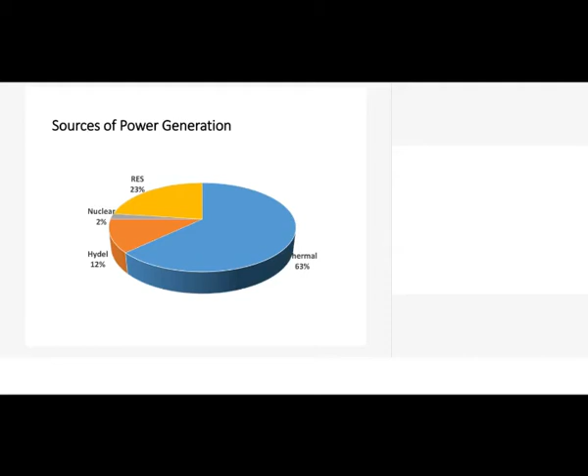Hello, yes sir, we can hear it. Okay, so this issue with technology, as we were just praising technology, we saw that my Wi-Fi got cut and I'm now on the hotspot. Doesn't matter, we always seek to find alternatives, and that is also the approach towards energy audit.

It's not all that easy. Energy audit is something where the designer has already built in something, and then the operations man is further trying to optimize as per his requirement. And then as an outsider, you go and try to meddle with the systems and seek improvements. It's a real challenge. So let's see, the need for energy audit is already known for those who have already seen these slides. It may be a repetition.

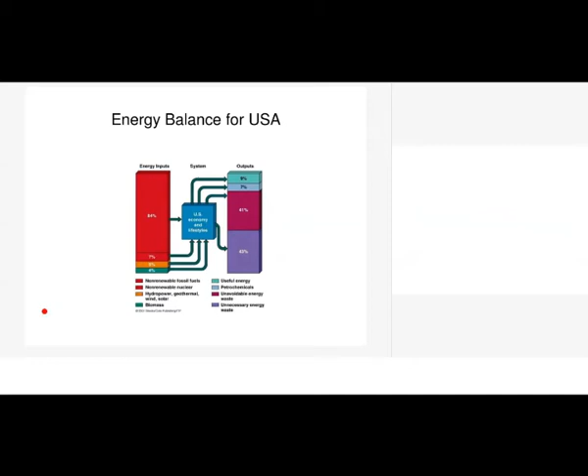Can you move to the next slide, Bharat? Control is with you. Yes, I will do it for you.

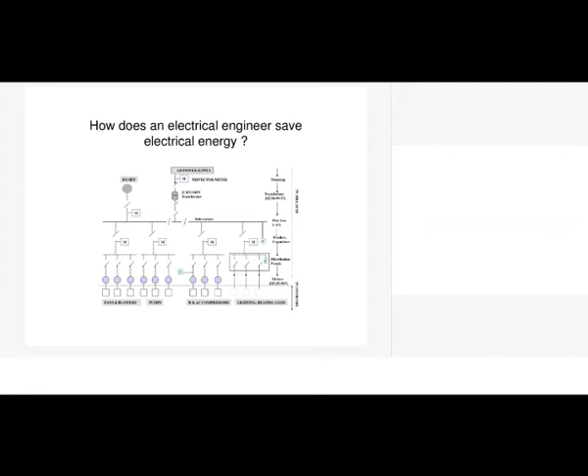Okay, again, let us say sorry that there are some problems here. Some work is going on here. So anyway, now let's go ahead. So can you now change yours? Are you able to change the slide? Yeah. Okay, fine, leave it. Okay.

Anyway, these are all things which are possibly known perhaps, and now what is meaning of purposeful energy audit? So there is a client who wants energy audit to be done, and what is his objective? His objective is to save energy, save money. Now, for that objective, how are you going to approach the energy audit? Because everything is new. As you enter the factory, everything is new, and we need to understand the process, collect information, maybe do some measurements, and then arrive at energy saving options which will be acceptable to the company. So this is a process. So in this process, the time you're going to spend is not much. Maybe you'll have to be on level or par with the people in the plant within a few days. You should be talking in their terminology, which means it's quite a big challenge for the energy auditor.

Now, fundamentally, as we want to save kWh, we know that it is a function of kilowatt, the power drawn, into number of hours of operation. So you can reduce kWh by reducing the power drawn, that is the kilowatt, or by reducing the number of hours of operation. So the potential exists for either or both, and you can reduce the kWh.

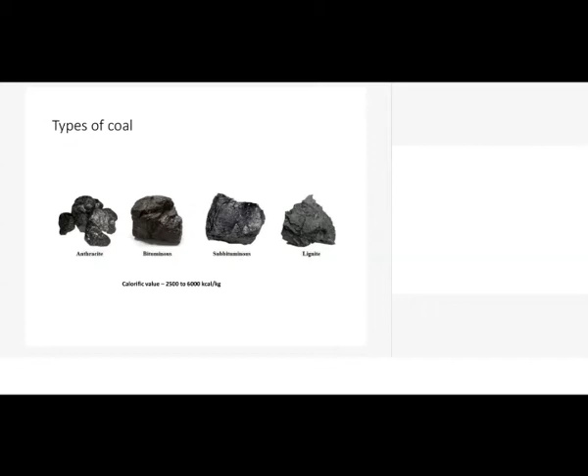So in many of these situations, when we look at an energy audit, normally we either focus on electrical energy or sometimes thermal energy, but in our opinion, over the past so many years we have done the energy audit, it always helps and it's beneficial to have an integrated energy audit consisting of all energy sources used in the plant. So these are the thermal energy sources, the petroleum fuels that we use, and then we also use coal for thermal energy.

In thermal energy we are mostly focused on efficient use of the downstream heat carrying medium, maybe steam or thermic fluid or hot water, whatever it is, because as we know, most of the boilers have become fairly efficient nowadays. So it's not like the Lancashire boilers, which were about 55 to 60% efficient. Today we have even fluid bed boilers which go up to almost 80% efficiency, and oil-fired boilers are anyway pretty efficient. So we had to look for reduction in steam consumption.

So that's how to optimize the steam consumption, reduce steam consumption, so that you can save fuel on the boiler.

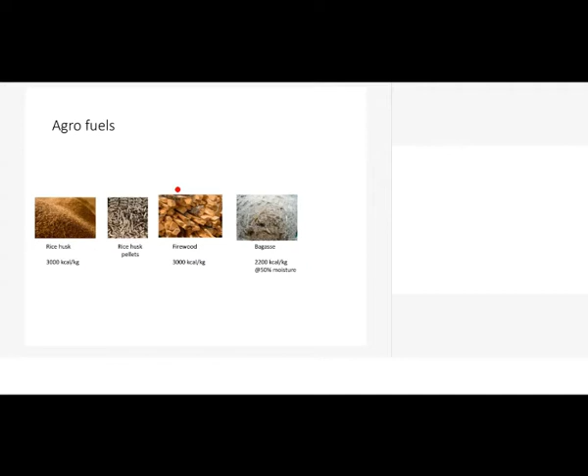So as we go into the plant, what is the first thing that we need to do? Of course, you shake hands with the head of the plant and get in touch with the people concerned. So preferably, we start with an opening meeting, where representatives from different departments are there, the head of the plant is there, and we explain the objectives of the audit. So then you get to know everybody at the same time, and also when you go personally to every department, the cooperation is ensured.

So you start with maybe a short opening session, maybe 1 hour. Tell them what the audit is, what we are proposing to do in the audit, and give some examples of successes which you have achieved in earlier audits. So it gives them some confidence, and also you can ask them about what are the various energy saving measures that they've already undertaken, so you know what is the level of the plant.

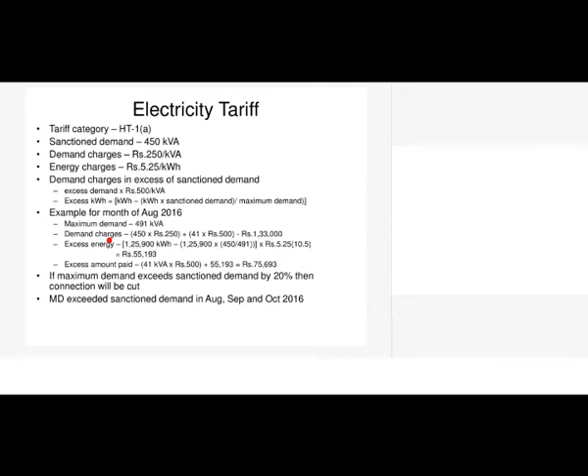So it's a two-part tariff, meaning that you have to pay for the demand, sanctioned demand 450 kVA, demand charges is 250 per kVA. So energy charges - these are all the things that you should be collecting in the initial stage itself.

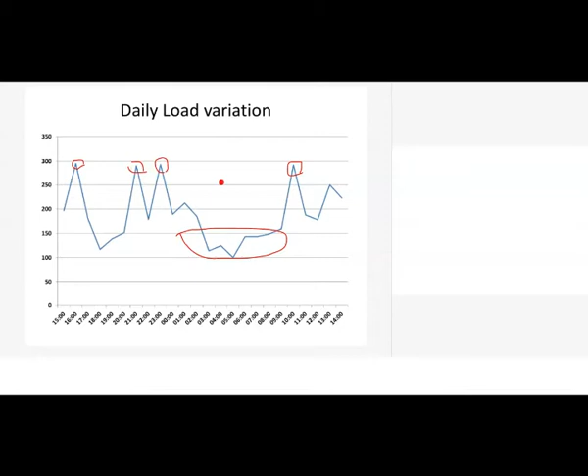So in bringing down the demand, again, you have to see whether it will serve any purpose. Because in some electricity boards or discoms, you have to pay for 90% of the contract demand, whether you use it or not - minimum 90% is the billable demand. In some cases, it is 100%. So it varies. If you are anyway less than 80% or 90% of the contract demand, it doesn't make much sense to do a lot of work to bring down this demand, since you will anyway be paying for the minimum billable demand. That is why the tariff clause is important.

And kVA, as you know, can also be reduced by improving the power factor. As you improve the power factor, the demand reduces. kW is equal to your demand into power factor. This is something which is often debated, whether power factor improvement will reduce energy consumption or not.

The power factor, cos phi. Now, what is this kW? Who decides the kW, or what decides the kW? So we have a motor, and then we have a pump.

Then the pump is pumping some water into the process. Now, this kW drawn by the motor - what decides the kW drawn by the motor? It's not the motor which says I will supply so many kilowatt. It is not the pump which says I will supply so many kilowatt. It is actually the demanded water - how much water is required here, at what pressure. The pressure of water and the quantity of water decide the kilowatt delivered by the pump.

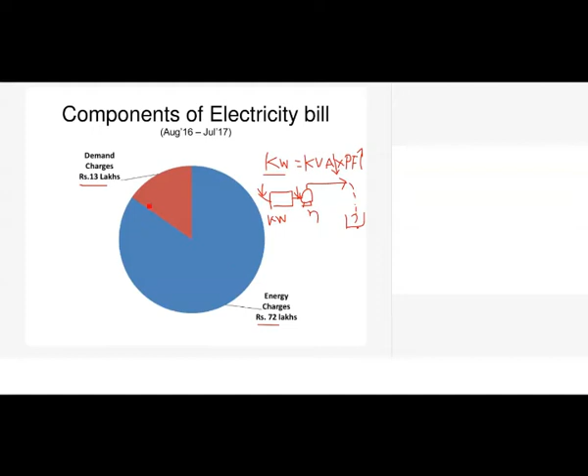And components of electricity bill - so as we see, what is the bill consisting of? The energy charges account for 72 lakhs. Demand charges account for 13 lakhs. So now we will see what is the impact or intensity of demand charges versus intensity of energy charges in a total electricity bill. This gives you a fairly good idea as to where the focus should be.

The most important thing, as we have seen in many of the audits, though not much attention is paid to this, is the energy balance. How much of energy is going where?

This is important. In the earlier days, there was no individual metering for different departments. But today's metering has become so easy and affordable that many industries have been able to segregate departments and provide individual meters for different departments. As a result, monitoring becomes easy.

Now here, in this pie chart, the printing machine section in this factory is consuming 51%, followed by post printing drives. So these are all the different departments: plate, baking, compressor, air conditioners. So all these different departments are there.

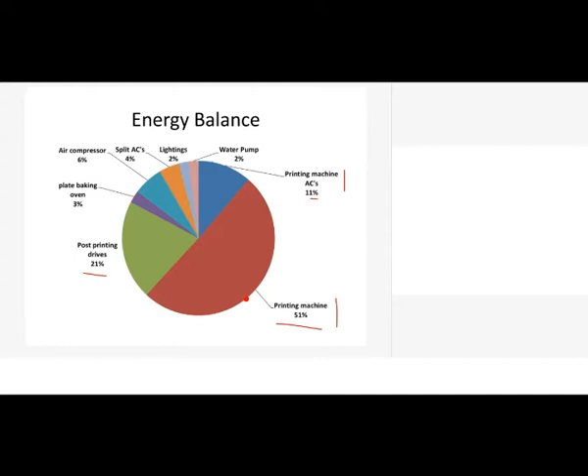Here, for example, printing machine air conditioners - it is not very significant compared to this, it's only 11%, but the potential may be high. So this alone cannot give you the focus area, but you'll also have to look into the potential possibilities for energy saving in different areas of operation. Together with this pie chart, you can fix the area where you need to concentrate or focus more.

Hello, Nagesh sir, there is a query from one of the participants. If an industry is not having individual metering, then how can we draw the energy balance?

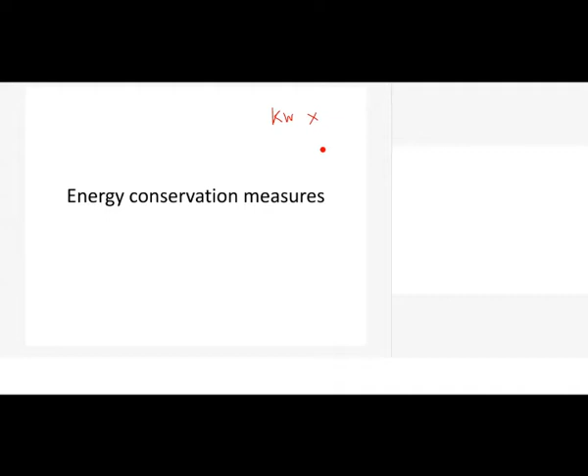Yeah, if you don't have individual metering, at least you should have a portable power analyzer or power meter, something which you can get for about under 50,000 rupees. There are portable meters available. So what we do is find out the instantaneous kilowatt drawn by the different motors in every department. Kilowatt is known, and you also find out the number of hours of operation. So roughly you get to know what is the kilowatt hours in each and every department.

So you don't have to have a meter, of course. If you have a meter, monitoring becomes easy and continuous. In the absence of that, this is the next best possibility. Okay.

Will it be an energy balance or an energy breakup? Sorry? So is it energy balance or energy breakup, what you have mentioned? Yeah, I mean, it doesn't matter. A rose smells as sweet with any other name. So whether it is balance or breakup, it's all the same.

So how much is the total energy coming in? You are accounting for that total input energy, where all it is going, how much it is consuming. So the sum of the energy consumed by different departments should be equal to the energy coming through your grid meter. So whether you call it a breakup or balance, it doesn't matter.

Yeah, any other questions? As of now, related to this, no sir. We can move ahead, and in the end. Okay, so anyway, you keep your questions reserved, so we'll spend more time on questions.

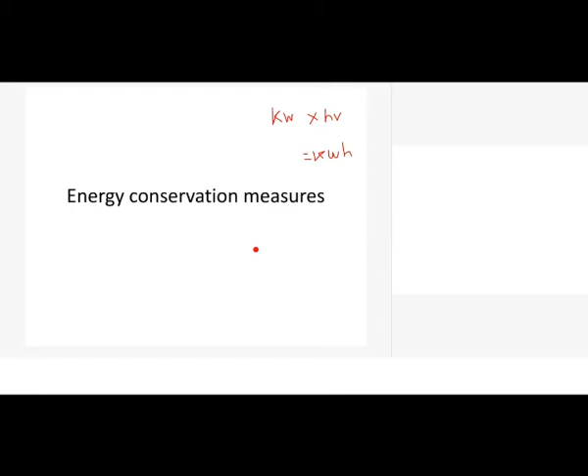So the 90% efficiency for the motor, you can take it for granted—it is going to be 90%. Because if you see the characteristic curve, efficiency versus load of the motor—so this is the efficiency and this is the load—the efficiency of the motor does not change much with respect to load from 50 to 100%. So this is the efficiency curve. You see this is 50%, this is 100%, so efficiency remains the same.

It's not affected much. But in the case of a pump, the efficiency curve will be like this. So this is the max, there is a maximum efficiency, say 75%—this is the maximum efficiency of the pump, at the operating point, the best efficiency point. If you're operating the pump, the efficiency will be 75%. Let's say about 100 meter cube per hour flow, the pump is operating at the best efficiency point. Suppose you want lesser flow, you want only 70 meter cube—then what happens? This pump efficiency can drop down to 40%.

But if you see a pump and a motor, when you go back and take a look at the motor and the pump in your industry, whoever is working in the industry or doing the energy audit—there's a pump, the motor, something is happening, some water or liquid is being pumped. So everything appears pretty normal. Motor is operating, pump is operating, all operations are fine, product is coming out, everything fine, no problem. So the production man says the pump is very efficient, it is giving him whatever he wants. The operations are enabled, operations are successful. But at what cost? We don't know, unless you measure.

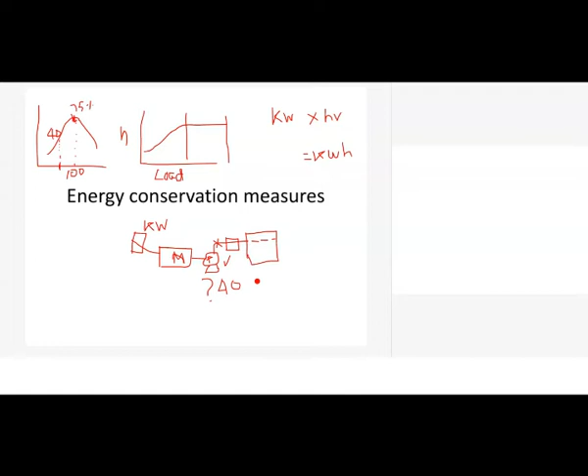This we would not have known if we had not measured. So this is a hidden energy saving potential we are talking about. If you don't measure, nothing, no problem. The process continues. The process is not going to be disturbed. But when you want to find out how much is the energy loss, or the potential for energy saving, you need to measure and dig out the energy savings potential.

So in this case, what were the energy saving measures? In the printing press, this particular DISCOM was providing incentives, so there was a chance to improve the power factor. Nothing extraordinary in this; now almost all plants maintain near about 0.99. In this case, there was a problem with some of the capacitor banks. Sometimes a faulty capacitor bank, for a brief period, causes the power factor to go down and the demand shoots up. So for that entire month, you have to pay for that demand. That means constant monitoring of your power factor helps.

Here is a very strange case. One doubt from participants: what method can be used if an ultrasonic flow meter is not there? What method for measuring that?

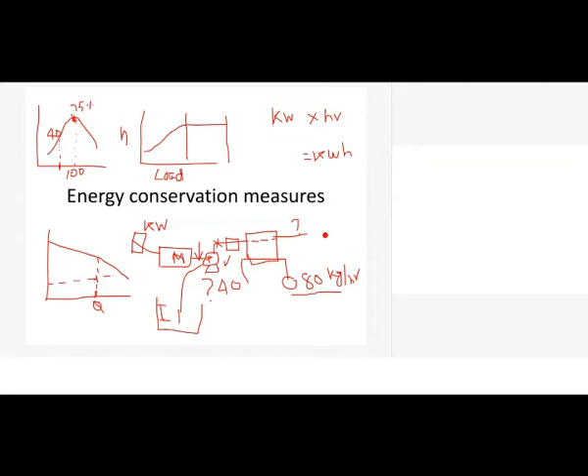Okay, so we were discussing about this, increasing contract demand. Normally, any plant wanting to set up an industry establishes a contract demand with the distribution company. And normally, it will be much higher than what their actual requirement will be, because they always look at future expansion, additions, all that.

So this used to be one of the most ubiquitous cost reduction measures in some of the earliest energy audits. If you take maybe about 20-30 reports of energy audits carried out between, say, the 90s, you will find the first saving measure will be reduce the contract demand.

So reducing contract demand, then you say so much savings, so everybody is happy, but nobody is going to reduce the contract demand. It will remain on paper, it will remain in the report, because once you reduce the contract demand, getting it back is such a big problem. So nobody wants to, even if it is going to involve some additional expenditure, additional bill amount, doesn't matter. So they will continue to maintain a higher contract demand.

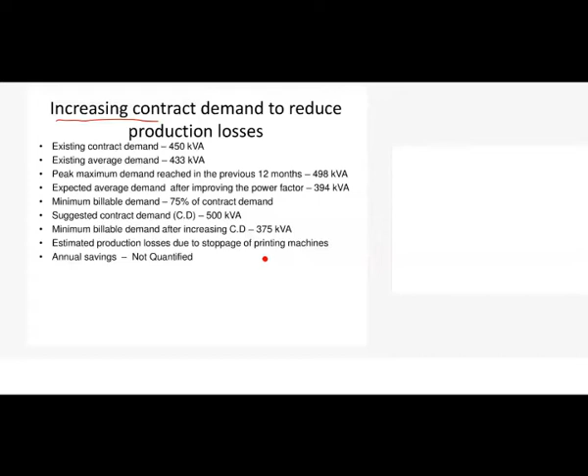DG set, as you know, the cost of diesel is almost 70 rupees per liter now. So if you operate a DG set, depending on the load, normally you will be operating 50 to 70% of the load, which means it may give 2 or 3 units per liter. So 25 to 30 rupees will be per unit. It's a huge waste. So the first thing for them was to increase the contract demand, and by doing this they could stop some of the diesel generator operation hours.

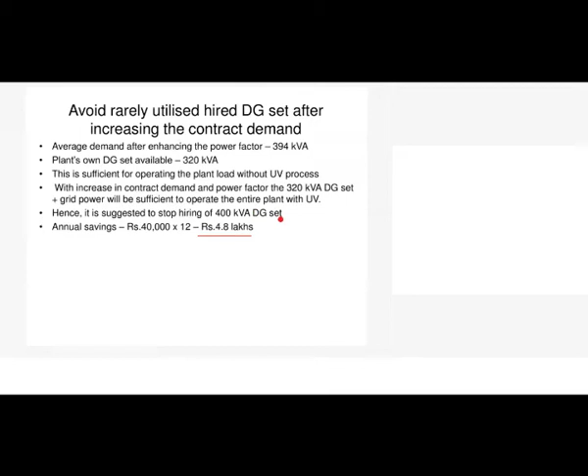Avoid rarely utilised hired DG set after increasing the contract. This is the process, so the savings will come from this. They have hired a DG set because their existing one is not sufficient, and they're paying hiring charges. Whenever demand is likely to go up, new machines come into operation and they run the DG set. In the previous financial year, this was the diesel consumption for that hired DG set, and that can be avoided.

So actually you have to have a holistic outlook as you go for the audit. You're not going to see things in isolation. You will have the entire mapping of the plant, and you have to link one thing to another.

Suppose we are now in the printing shop, where an 8-color printing machine is there in this room, and this room is air conditioned. So when you're here, you should know what is the transformer rating, what is the tariff, what is the energy consumption, maybe some compressed air is there. At the back of the mind, you should have the entire factory mapped. It should be there in the back of the mind, because there may be linkages from here to there.

Okay, so here we have a printing machine, and this room is air conditioned. You have to calmly observe what is happening. So don't rush and measure the power consumption of these air conditioners or these motors running the machines. Nothing to worry about it - simply observe quietly what is happening. How the papers are coming, how the ink is being poured, how the screens are being changed. You keep on observing all these things.

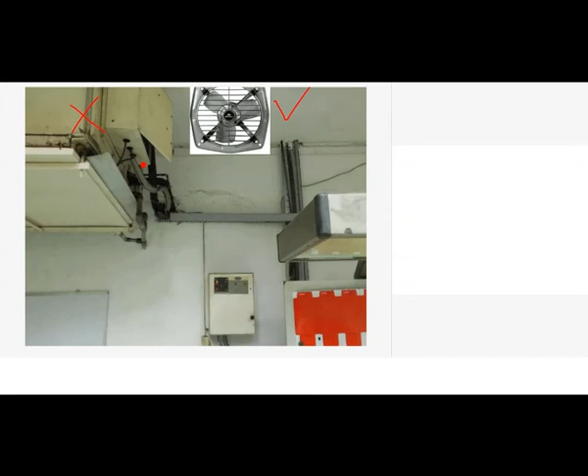Now, what is the benefit of this? An exhaust fan is provided, and as you can see, the energy savings from this is almost about 60,000 units per annum. In monetary terms, that's about 3 lakhs. For an exhaust fan, opening the wall and installing it costs hardly about 20,000 rupees.

So basically, you have to observe the process, what is happening. Observing one full cycle is preferable, because if you've not been there for the entire day, you would not have known about this downtime and the 10 hour changeover time. Accordingly, your ideas for saving will vary.

So in a simple printing press, it can be quite a significant saving. 3 lakhs is quite a huge saving for them.

And in the same room, what was happening - there were also some heaters on this right side. You will find that some heaters were provided, which of course were taken out. So you'll have to see what are the unnecessary heat loads in this room.

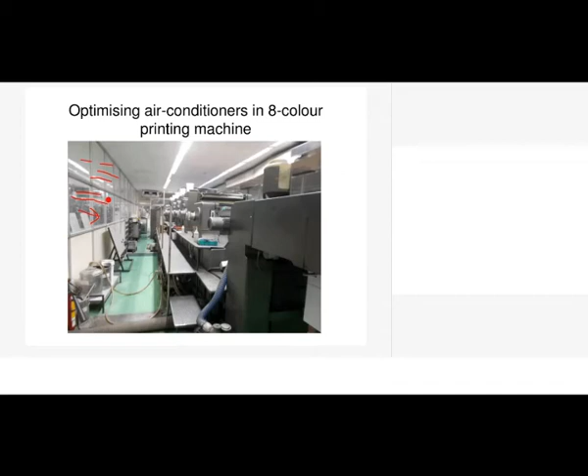For this, there are several suggestions. Somebody suggested putting heat resistant panels or double glass. Anything can be done, but the objective is to prevent this heat, which will further reduce the load on the air conditioner.

We have some questions. Is it okay to throw out the VOCs to the atmosphere, considering the pollution? That's one question. The next question is, will the functioning of the AC not get affected by the exhaust fan, because there will be some cooling loss at the exhaust openings? Also, while calculating the savings, the power consumption of the exhaust fan shouldn't be ignored.

Now, the first question is about simply throwing away this VOCs into the atmosphere - what is the impact? If it were not thrown into the atmosphere, what would have happened? The operators working inside that packaging plant would have consumed it - they would have acted like scrubbers, absorbing all the VOCs themselves. Now we are throwing it into the atmosphere instead.

What is the extent to which these VOCs will have an impact? As you throw it to the exhaust, a lot of dilution takes place. Within the room, there is a concentrated environment with VOCs. When you put it outside into the air, it gets diluted. Of course, we don't have standards for VOCs from these kinds of printing machines, so it is assumed that these exhausted VOCs will dilute with atmospheric air, and may fall below detectable limits if you use an ambient air sampler. That is number one.

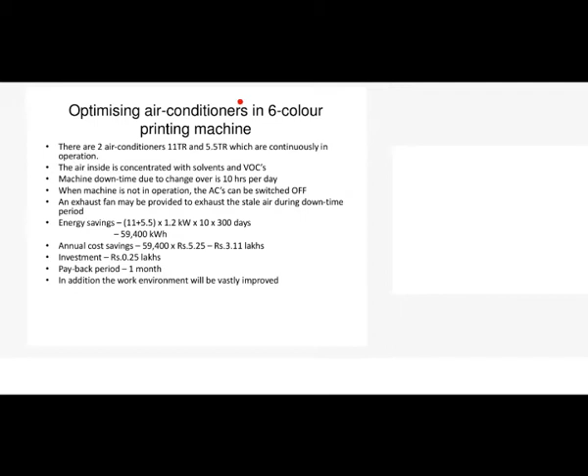Similarly, there is one more 6-color printing machine, and the same measures apply to that also.

And here, a very funny thing has happened. So they actually make cartons - cartons for packaging. If you see, the whole shop is involved in making those cartons from the printed rolls. Come here, then there's cutting and all that, then they make these carton boxes for packaging. So it's a huge shop, and these are the lamps which are there.

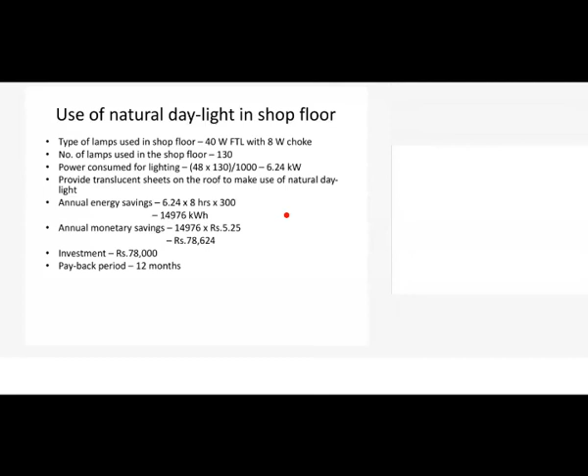If you see, this has come about because they found that the entire place was getting heated up during summer, and workers were not able to work productively. So what they have done is they have provided an insulating layer here - the complete roof is insulated. As a result, temperature has been controlled, and a reasonably good work environment is there, but the openings have not been provided for allowing natural light, which has resulted in keeping these lights on even during the daytime. So this is one of the things observable in this printing press. What they need to do is cut open the insulation in a few areas and provide translucent sheets to allow natural light to come in.

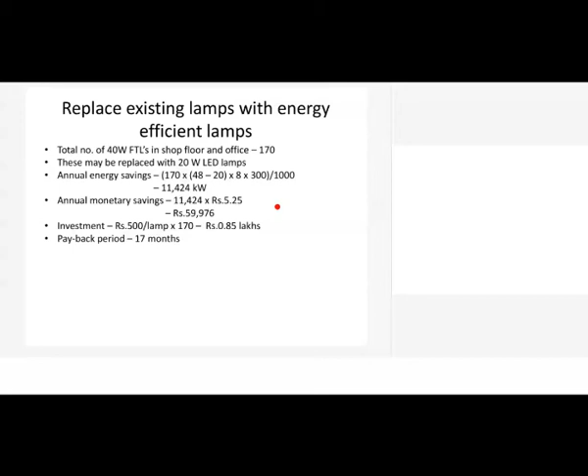So the printing industry itself - it's a small industry, as we said, 500 kVA of demand - and you will see the kind of saving potential that is there with keen observation, critical examination, and looking at alternatives.

Yeah, this is a fountain solution chiller. There's one more chiller here. The printing machine is here. As I said, that heater is on this side. This is actually a chiller for keeping what is known as a fountain solution, which is used in the printing. So an entire chiller is kept inside the air conditioned room. What happens is it is chilling the water, then the refrigerant goes to the condenser heat load, and the entire heat load is coming into the plant again. So this is a unit chiller - this can be kept out. Only that you bring a pipe inside, the fountain solution can come inside. Otherwise, this condenser part can be kept outside of the room to avoid the heat load, to minimize the heat load.

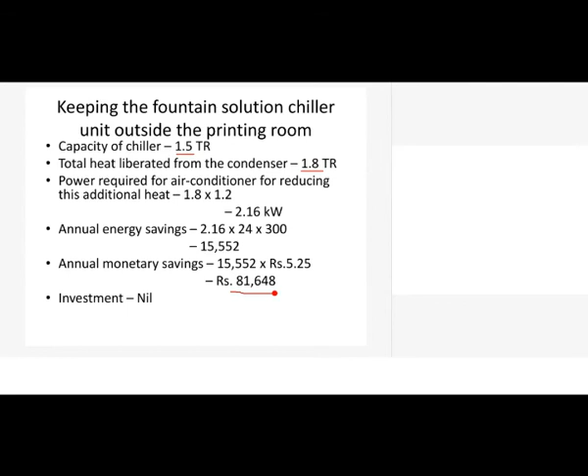So basically, we need to see the root cause - why is the air conditioner required? When you start from that, what are the heat loads? What can be avoided, what cannot be avoided? And here in this small chiller, what we had seen earlier, this is a 1.5 TR chiller. Total heat liberated is this much. So by keeping that outside, you save quite significant - on an annual basis, about 80,000 rupees, which is quite good for a printing industry.

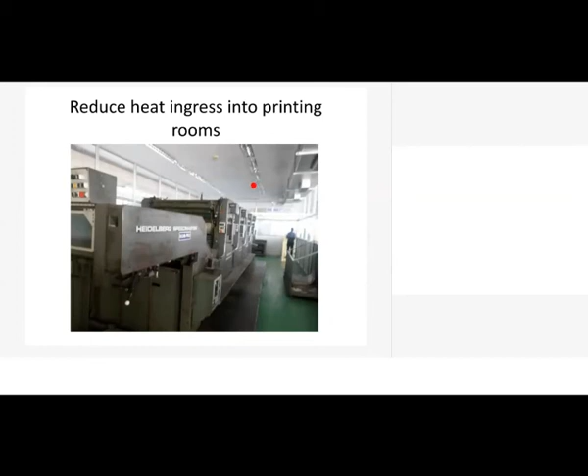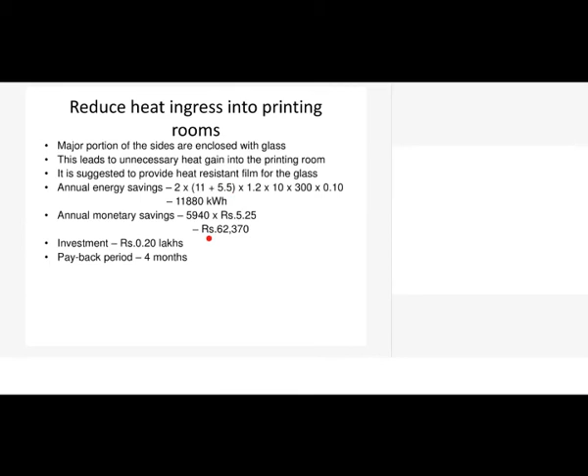So this is the printing machine room. We are reducing the heat ingress by identifying all the heat loads that contribute to the heat load. And this is the glass, the side glasses, heat resistant film they said they'll go in for. That is going to save them about 60,000 rupees.

So the approach is the same, irrespective of the type of industry, whether it is a cement plant or a steel plant or a power plant or this printing press. We are only looking at the energy audit approach. And also this air conditioners, why it should be continuously on.

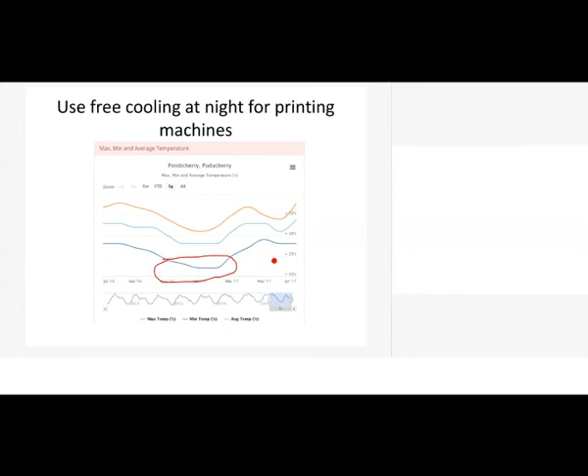So why operate the air conditioners? During night time, when the temperature reaches 25 outside temperature, you can have a control. When it reaches 25 degrees, you switch off the air conditioners and operate the exhaust fan. So that is a concept called free cooling.

So you have a sensor. Inside the printing room, you have the ACs, and what you need is a sensor which will sense the atmospheric temperature, then interlock this with the air conditioner and the exhaust fan. Once the temperature reaches 25, outside temperature is 25, inside temperature also is 25. Why run the air conditioner? Switch off. Then the same interlock should operate this exhaust fan.

Exhaust fan keeps operating. So this is the free cooling that they get during some portions of the year, especially at night. And this is a big saving, about 6.6 lakhs for this. This is a huge saving.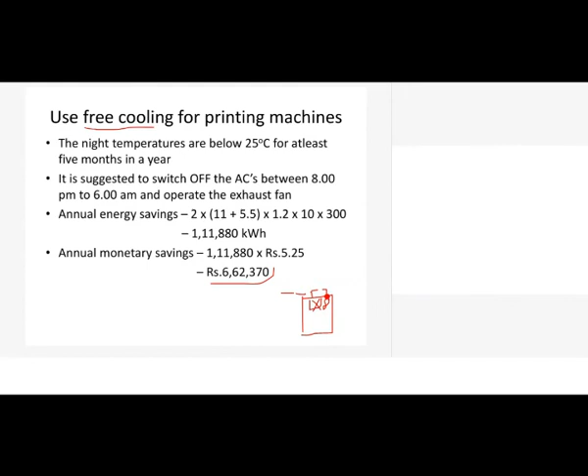For these things to actually get implemented and to make it work, we need to break the mindset. See, all the plant people, production people especially, have a huge mindset that we have been doing like this for the past so many years. And that mentality has to be broken.

Otherwise, it's very difficult to convince them that this logic will work. So it requires also some training to the operators, to the people in the production shop, on what is the significance, why we are doing this. It takes a little bit of effort. It's not that easy - you switch off the AC, and it's going to stay off. It's not going to happen.

Even at home, it is not happening. We tell people at home we should keep it at 25, 26. It doesn't work. Children, they keep it at 18 degrees and put a blanket and sleep. Outside temperature is 45 degrees, but inside they keep it at 18 and put a blanket and sleep. So it needs a lot of effort to change the mindset.

That is one thing which is a barrier for implementing many of the energy saving measures. But in this case, since the management was very progressive, they took a decision, they took trials, they took immediate decisions, and they were able to implement it.

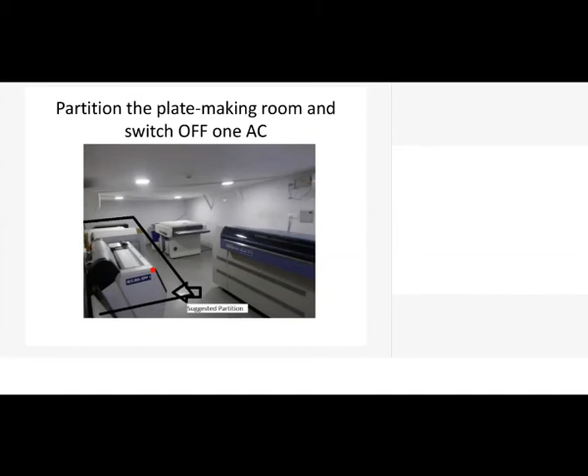And here also, the air conditioners in the plate making room - where air conditioning, what needs air conditioning? So only where you need it, you air condition, provide a partition, and minimize the air conditioning load.

This, not much, but still for the printing industry, it is quite a significant saving.

This is a straight case. I mean, there is nothing to discuss. When you reduce the pressure of the air in the compressor, the power will come down. So anybody gets a checklist measure, a menu card measure - reduce compressor air pressure. You don't have to think about it. You only have to look at the meter, pressure gauge, see what is the pressure setting, loading, unloading.

So they're operating between 8 to 10 bar, which is pretty high. All you need to do is reset the pressures, loading and unloading pressures, and take a trial, because everybody wants some kind of convincing - they're not going to easily accept it. So we gradually reduce from 10 bar to 9 bar, 9 to 8, 8 to 7.

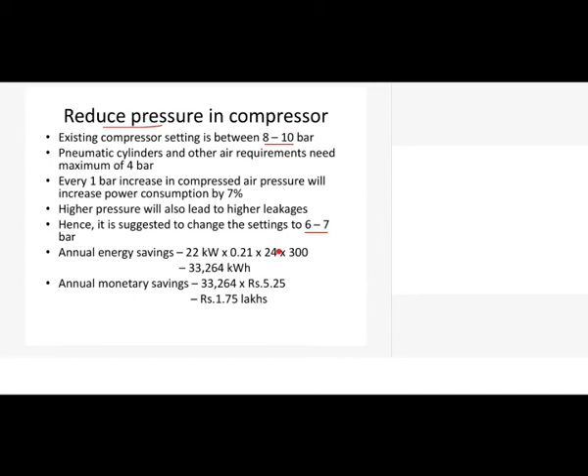Then we'll see what are the critical areas where compressor pressure might matter. Observe those areas closely, whether functionality is getting affected or not. Then you go for this setting, 6 to 7. Below 6, of course, some of the critical equipment cannot handle it. So we set it at 6, and upper pressure at 7. So this is again quite a huge saving.

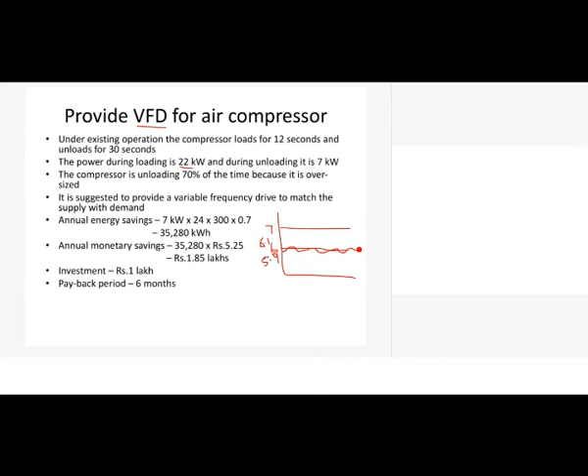Only thing, you need a pressure sensor. The advantage with the VFD compressor is that in existing conditions, they have a pressure bandwidth of 6 to 7 bar - the compressor loads at 6, unloads at 7. With a VFD, you can operate between 5.9 and 6.1, depending on the transducer's sensitivity - say 5.99 to 6.01 or 5.9 to 6.1. So when pressure drops to 5.9, the VFD increases speed; at 6.1, it reduces speed. The pressure is constantly maintained. Instead of a bandwidth of 6 to 7, a constant pressure of 6 is uniformly obtained.

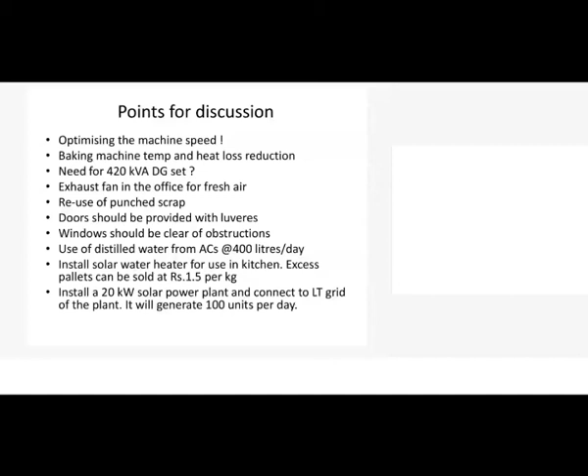So this is another option that is available. There were other things which they couldn't decide on - they wanted discussion with their head office, so we kept that in abeyance. Also this insulation - these are all minor things, but they still matter. Cumulatively, they can lead to significant savings.

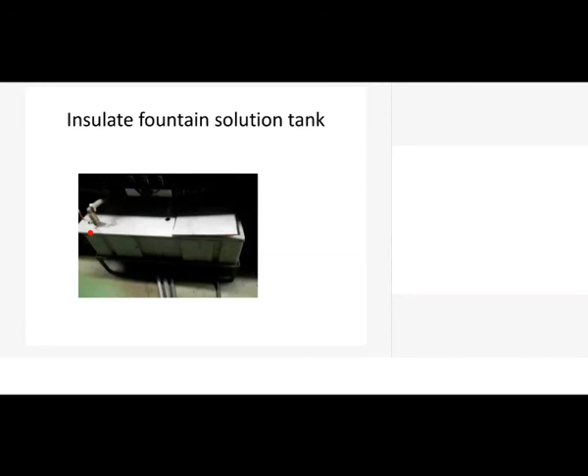The fountain solution tank that we saw earlier inside the printing machine is brought out, and the whole tank, which contains the fountain solution at about 8 degrees centigrade, is not insulated. So insulate it - this will reduce the energy consumption of the chiller.

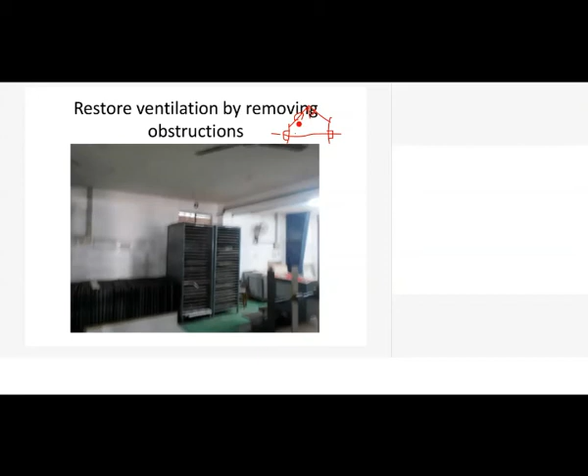In the plant itself, this is a mistake many factories make. The plant is so beautifully designed with cross ventilation. A typical factory shed will be like this - there's a window here, and right on the opposite side another window, so there's cross ventilation and free flow of air. If you have a north roof sheet, there's an opening at the top, and if you provide turbo vents, the hot air will tend to go up. This cross ventilation is required for worker effectiveness.

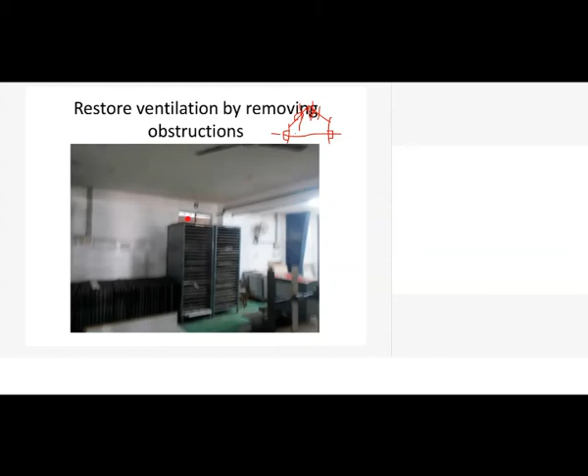Many times we find these windows getting blocked by storage of materials, leading to a hot environment inside, which is why they went in for roof insulation. This company went in for roof insulation because all the openings were blocked by storage of materials, and the entire shop floor becomes hot. So this is one area where some focus is required to ensure a good work environment.

So these are some minor details which we will skip.

This is a baking oven where the screens are baked. Whatever screens we saw in the rotary printing machine, when the screen is made, they're baked at over 200 degrees centigrade in this oven. This oven, if you see, is kept inside an air-conditioned room, so the entire heat coming out of it is absorbed by the air conditioner. You can provide a partition, isolate it, and provide an exhaust fan, isolating it from the rest of the room.

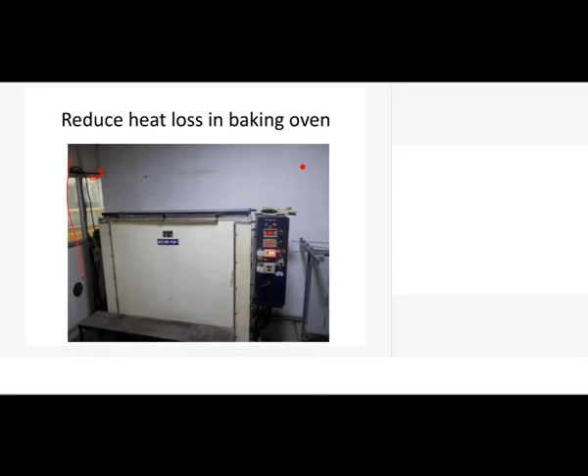One major problem this company had was they were getting rolls of this cotton paper from the paper mill, and it comes with wooden packing. So much wood had to be disposed of - they were paying money to a contractor to dispose of this wood, the packaging wood, because it was occupying so much space inside the factory.

Now, as we go around the plant, having seen the different departments, we go to the canteen. In the canteen, they are using firewood for the boiler. The question was whether this packing wood could be used in the boiler as fuel. It can be used, but some changes had to be made in the combustion system - we had to have a wider opening for the boiler in the canteen. With this slight modification, the waste wood went into the boiler in the canteen, and they stopped purchasing firewood.

The entire canteen is now met with the waste wood coming out from the packing, and they're able to boil rice, dal, and other cooked vegetables using the steam. So they were incurring some costs before, but now they are saving on firewood - it's a benefit in both ways.

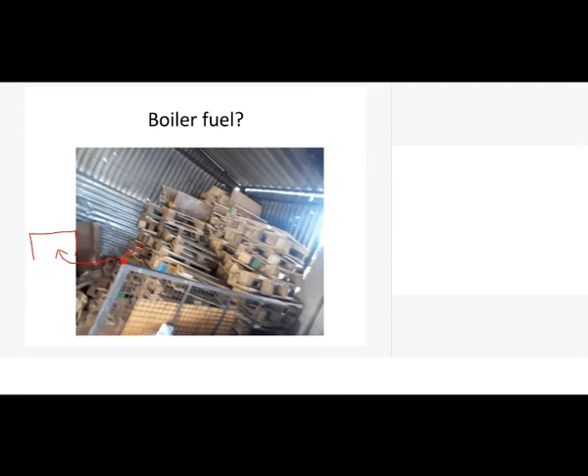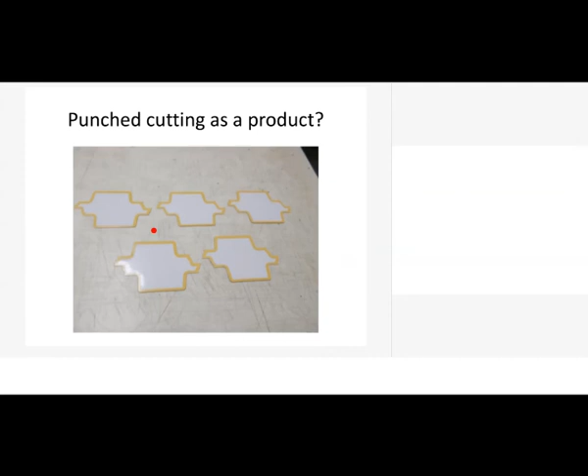So these are the wastages. When you're doing an energy audit, this may seem to be outside the purview of energy audit, but still, there is an energy content in this waste. A lot of energy has gone into making some product, and there will be some wastages. They make cartons, and in making cartons, they need to punch openings or slots. For example, in this carton, they make a punch here, remove this carton material, and put a polythene sheet so the color of the product inside is visible outside, as we see in the market.

So what happens to these punched-out pieces? Already a lot of energy and material and resources have gone into making this, and then you punch it out and throw it away. It goes back to the paper mill again to get pulped, and then carton paper will be made again.

Instead, we are looking at whether there is some use for this waste material that comes out. This itself may be a few tons per month. Probably this can be used as a price tag in some garments or other accessories, or you can cut out this portion and use it as labels.

So finding alternatives for this waste is important, because there is energy content and resource value in it. Without getting used, it has come all the way from the paper mill, we've done some modifications and put resources into it, and then we are discarding it back to the paper mill. This is against the concept of circular economy, so we should try to find some use for this and put it to use.

Solar water heater for the canteen was an additional thing. Today with vacuum tube collectors, you get good hot water even if the water quality is bad. If you have borehole water, even with high TDS borehole water, they were able to heat the water to 90 degrees.

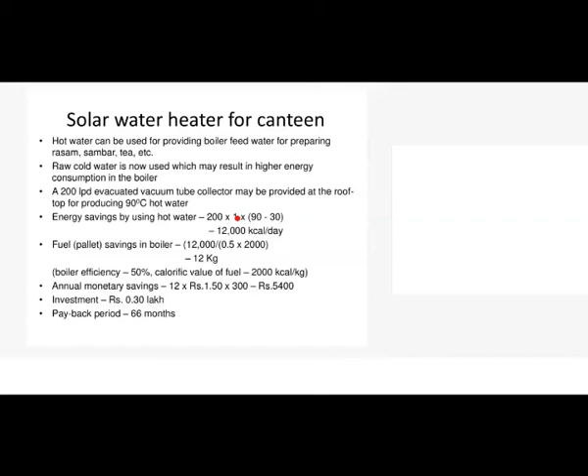Renewable energy itself, we've been talking a lot about, but it cannot replace the concentrated energy that we are using. If you want 10,000 kilocalories of heat, it is available in just 1 kg of oil, which is just like maybe 2 or 3 cricket balls in size, giving you 10,000 kilocalories. But to get the same 10,000 kilocalories from a solar heater, you may need about 10 to 12 square meters of space. So there are limitations to using renewable energy. It cannot wholly replace conventional energy, but it can supplement whatever energy sources we are using.

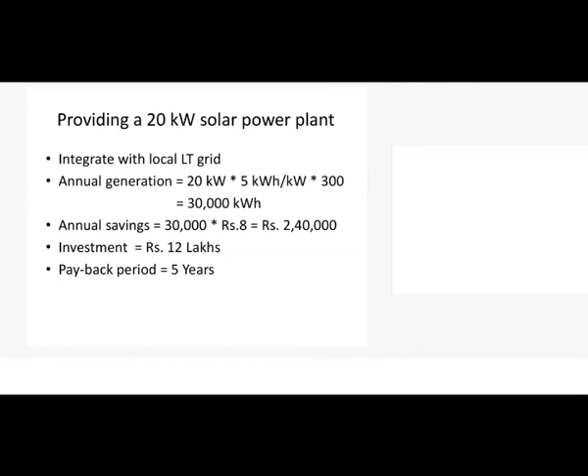So that was about the printing machine, and that's a fairly straightforward audit. Again, it involves observation, critical examination, and a little bit of lateral thinking, discussing with people, taking trials, implementing, showing the results, and then the audit is over. That is a typical small case, but the same approach is required in other types of plants also.

In many cases, you find that some industries are short on basics. So we went to one of the industries which are making special metal powders. The metal powder is in the form of a liquid slurry made from a mixture of metal powders.

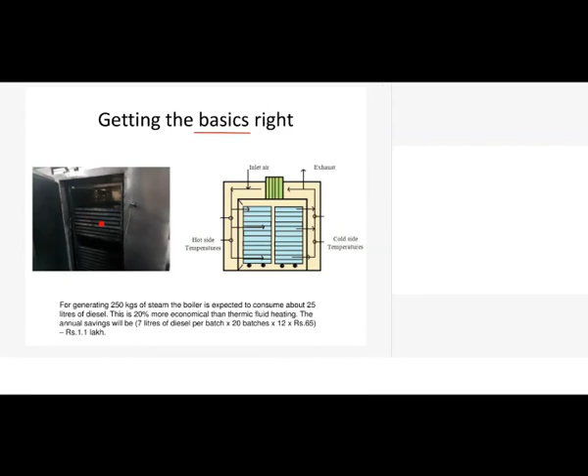That slurry needs to be dried to get powdery material, so it goes into a tray dryer. This is a tray dryer with a lot of trays, and the slurry is poured into these trays. Hot air will go inside and remove the moisture, making it dry. The hot air enters through a heat exchanger, and in the heat exchanger there has to be a heat source—you can even have electrical heaters. Some tray dryers use electrical heaters. The purpose is simply to make hot air; the air should be hot.

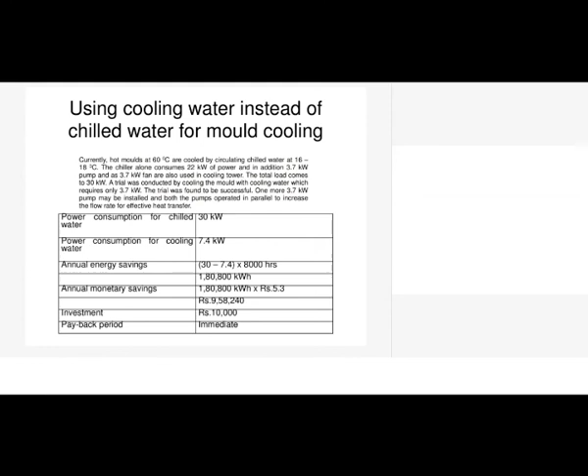So this hot air will go and dry the product. In this case, as we went inside, we saw a boiler, and there was also a thermic fluid heater. So boiler and thermic fluid heater in the same shop, it was quite surprising.

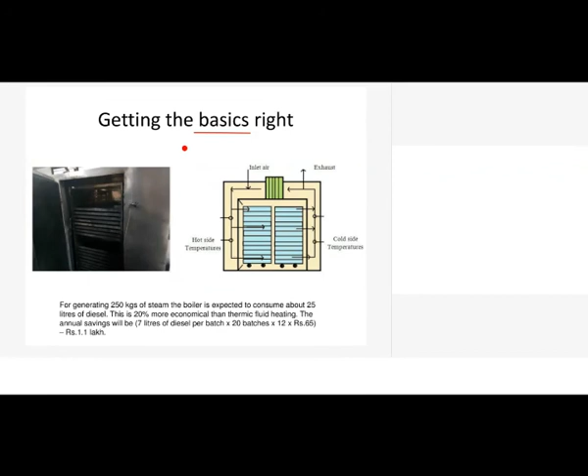As we asked the person in charge, he was telling that initially they were using a steam boiler. The boiler is a small boiler, 250 kg per hour boiler, small boiler, diesel fired.

So it used to generate steam, and steam was sent to the heaters to generate hot air, and they said it was consuming an enormous quantity of diesel. So some other manufacturer came and suggested, instead of boiler, you go for thermic fluid, it reduces diesel consumption. So then they put up a thermic fluid heater, again a small one. Thermic fluid will go into the heater, circulate and come back. Again, diesel is used. So they said, okay, they were saving energy, so they discarded this boiler and they were using thermic fluid.

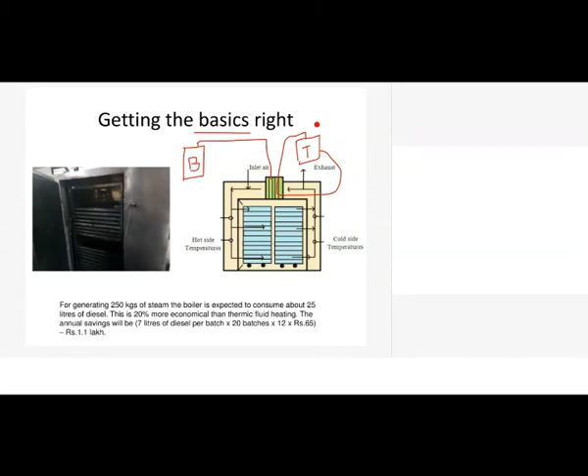But we know from the basics, there is nothing like a better heat carrier than steam, especially for these kind of low temperature drying applications. This is only 90 degrees air temperature required, so for 90 degrees air temperature, steam is the best medium for drying.

So what happens in the steam, as we boil water from 30 degree water, as you keep on heating the water, it becomes steam at point B. It doesn't become steam immediately, it becomes water at 100 degrees, that is, it reaches the boiling point. If you further add heat, the phase changes from water to steam. At point C, it becomes fully steam, saturated steam. Now this heat we have added up to that point is called the sensible heat, and this is called the latent heat.

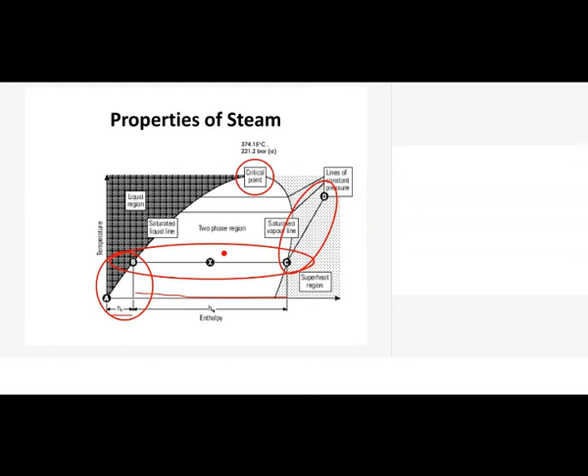So this is what we are going to use in the dryer. The steam will go inside this dryer, the latent heat will condense as the air goes on the other side, so a lot of heat is immediately transferred to the air. Quick heating will take place and this hot air can be used.

Then why this thermic fluid, which is operated at 200 degrees, for 90 degree air they are operating at 200 degrees, why should this be used as an economical means? Does that mean thermic fluid is more economical than boiler? What are the problems? It was going against the basics, so we started the discussions and went around the whole system.

Then we asked for the steam trap. Normally what will happen, the boiler steam will come, go into the heater or any equipment, heat exchanger, then at the outlet you will have a device called steam trap. What is the purpose of the steam trap? It will ensure that steam condenses and only the condensate comes out, meaning the latent heat should be transferred to the air.

In this case, surprisingly, there was no steam trap provided. So he was telling the boiler used to be on and steam used to go inside the heater and so much of steam used to go into the atmosphere. Then when the steam does not condense, how will the air get heated? So they kept on sending steam and the air temperature never used to reach 90 degrees. So they had a lot of problems.

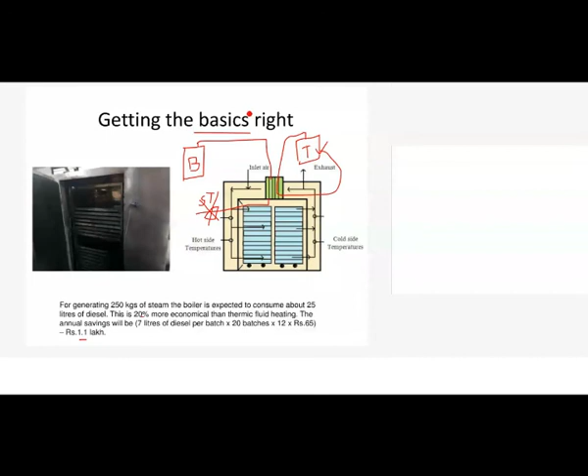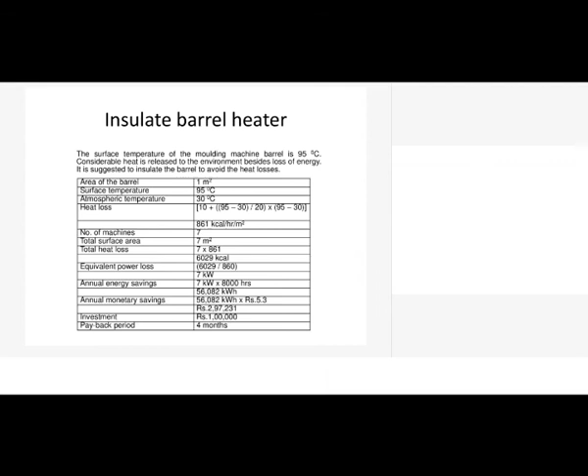So the thing is, whatever we acquire in terms of knowledge, we need to look into the practical aspect. We go to the field with that at the back of the mind. Some of these techniques we are discussing should be kept at the back of the mind, and you apply them, so a lot of saving potential is possible.

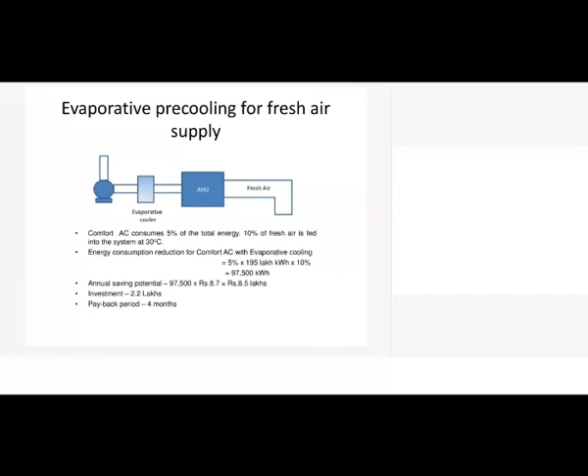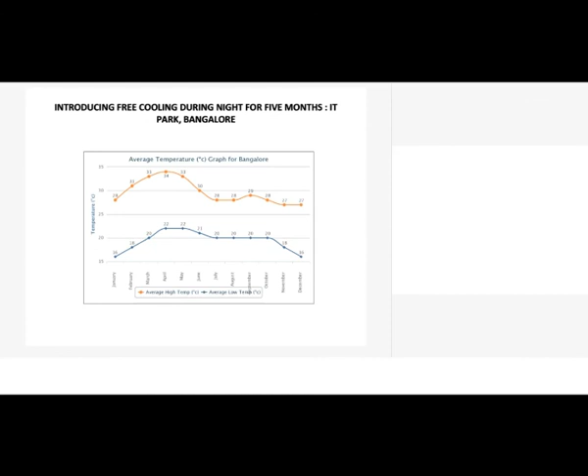So many times we find that energy audits are at a surface level. It may be a 500 megawatt power plant, then the major energy saving measure is you change the existing lamps to LED lamps, you put a turbo vent. So these are not the kind of recommendations that we look for from professional energy auditors, and not only us, but the client themselves.

They're looking for something, not a miracle, but some well-evaluated audits need not always result in energy savings. Even after auditing, if you tell them that we have done the audit, everything is fine, there is no scope for saving, that is also a good audit. But just for the sake of showing some energy saving measures or filling up the report, we provide unnecessary data, unnecessary measurements, so it doesn't help.

So energy auditors should focus on the process. You have a process-based approach. Look into the process, observe the process, and then you see what is the energy interaction that is happening. So, for example, here, sometimes this happens. In a big industry, maybe about 2000 kVA is the contract demand.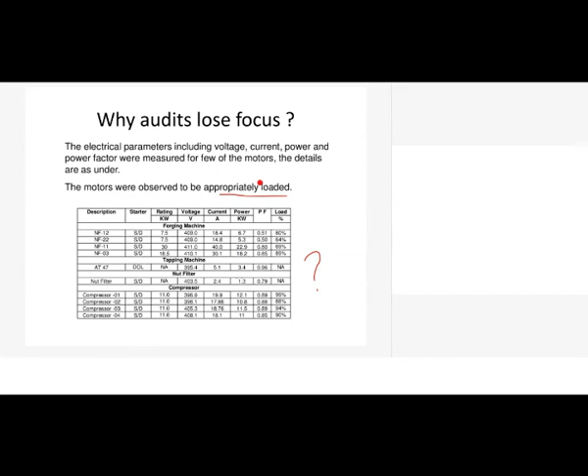And this is another very strange case where the compressor has a motor pulley belt slippage issue. So what has been done is, the various motors, we have measured, the pulley sizes have been measured, and this formula is also mentioned, pulley diameters. So rated RPM is there. What is the driven RPM, the drive RPM? What is the slippage, has been calculated. So motor slip or the equipment slip has been calculated, the belt slippage.

So one machine it is 1.7%, one machine is 7%, 2.6%. So what is that? Belt slip shows considerable variation from 1.7 to 7%. The slippage needs to be negligible for a well-designed system, but typically acceptable belt slippage is less than 1%. The slippage leads to proportional loss of motor energy and needs to be monitored and controlled at regular intervals. It is suggested to check the belt slippage at periodic intervals and take remedial measures, including replacement of components, adjusting the distances, servicing, tightening of the system, etc. The system may be redesigned in case of persistent slippage.

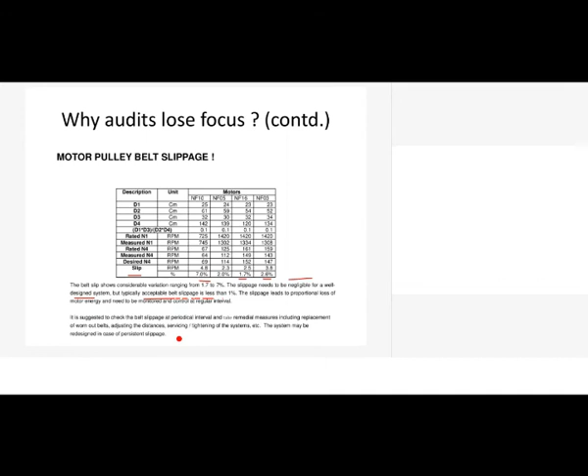So what do we get out of this? Okay, there's a belt slip, so what? Slippage itself is not going to consume energy. If the belt is slipping, then lesser energy will be consumed, which is good. So these kind of measures actually take the focus out of the audit. Our audit has to be highly concentrated, and it should be focused. And these kind of measures, maybe from a different angle, it may be useful, but not from the energy audit point of view.

So also this indiscriminate use of the power analyzer - keep on taking all kinds of measurements possible. Somebody says my meter can measure 150 parameters. So what? What is that you're going to do with 150 parameters? All that we need is kW. We are not concerned with any other parameter. In some cases, of course, power factor when you are checking with the grid meter. But otherwise, simple thing what we want is kW. kW before, kW after. Some change you have made, what is the difference?

So I'm also surprised that many of even the clients ask for calibration of meters. It's really surprising. See, we're not here to design things. We are here to save energy and estimate. Probably this is the extent of savings that is possible. We are not here to accurately, pinpointedly say that this is the energy that will be drawn. And that doesn't need a calibrated meter to check and verify. And I'm even more surprised there are certified measurement and verification professionals available for checking the energy savings.

So what has been the impact of such monitoring? Are they going to do something extra than what the energy auditor is doing, or the plant people are doing, or any engineer is doing?